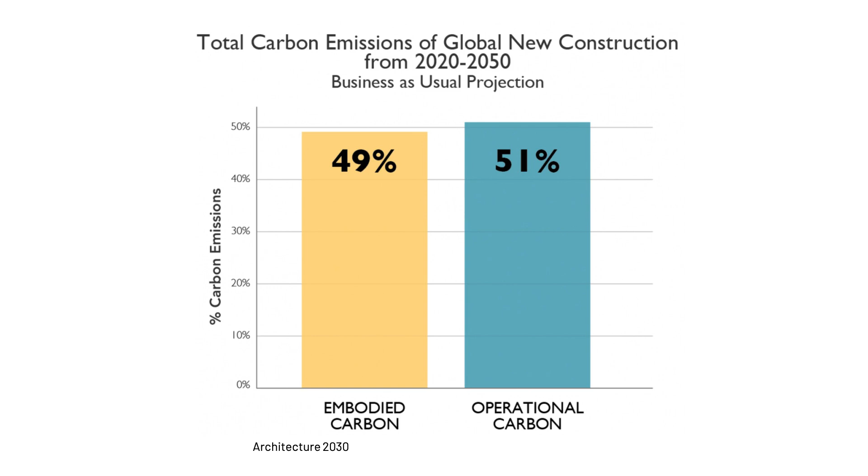About 3 or 4, maybe 5 years ago, it started to become obvious through mathematical studies that embodied carbon is actually about as important as operational carbon. Embodied carbon is the energy that goes into building the building - that's the mining, the forestry, manufacturing, trucking, getting it to site, and the energy on site to put it all together.

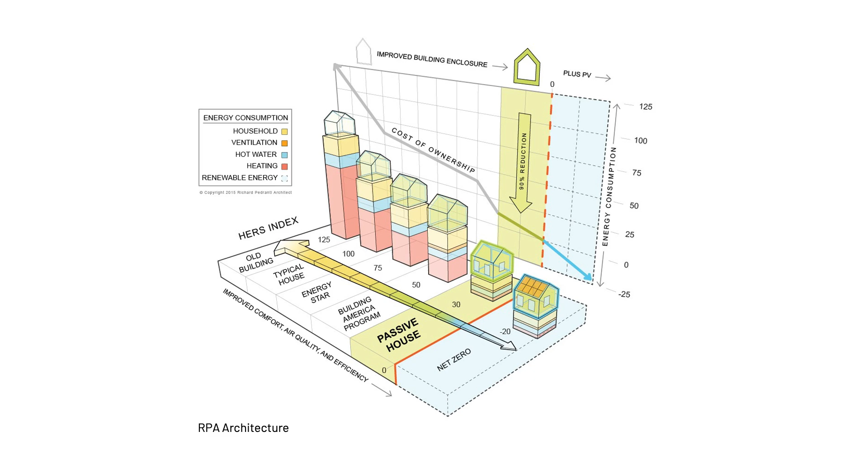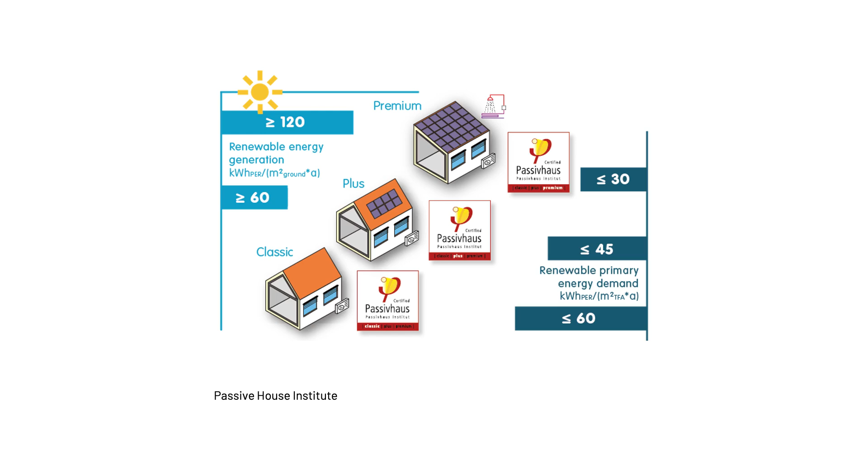Passive House itself also offers those classes - my house is a Passive House Classic. We have the ability, and it's designed to put solar panels on the roof, which is controversial because solar panels don't work maybe as well as we all wish they would around here. But nonetheless, through these different stages you can get to a 90 to 95% reduction in your energy use within the building itself, and then also start to produce energy on site and become energy positive.

So it's a great framework. One of the things about that is, if you're going to start producing energy on site, you really want to reduce your loads as much as possible before you start producing that energy, because energy is hard to produce. We use it quickly, the technology is changing all the time, so that technology becomes obsolete, and you're now swapping that technology out, and it's very impactful in its production, in making the technology.

So by creating a building that has as low demand as possible, now you're able to put in a very small energy production system and have a real impact on the needs of the building and hopefully its community. So how do you produce a passive house? It's not really that much different than the housing we're building today - it's just doing what we're doing, but a little more clever, and a little more of it.

My own house actually has 16-inch thick walls filled with cellulose. We got R60 walls, R100 ceiling, and the insulation wraps around the foundation. So that's the first step - really good insulation.

The second step is really good windows, and there's excellent windows being produced throughout Europe, and now they're starting to be produced within BC - that's helping to bring down costs.

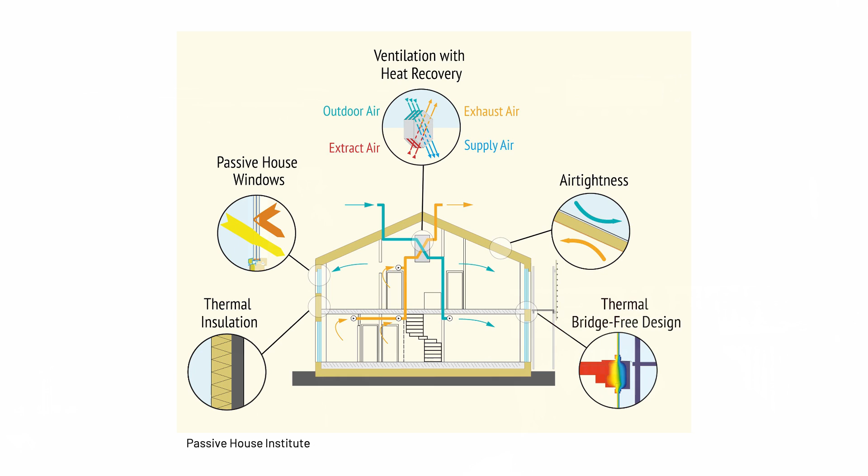And the last one is thermal bridge-free design. You don't want any large pieces of structure sticking through that thermal envelope, helping to conduct heat in and out of the building and causing condensation opportunities. And that's it, those 5 things.

We're already doing most of this. It's just that the software we're using to model it, HOT 2000, is an archaic piece of software and isn't as nuanced or effective as the Passive House software. We can get to that 90%, 80% efficiency through Passive House, where we struggle to get there with the software used under the STEP code.

And that really is the first job of Passive House. I'd say the most important job of architects and engineers today on the planet is to figure out how to get there as quickly as possible. So energy efficiency and low embodied carbon are of course first. But Passive House offers so many other reasons to consider building that way.

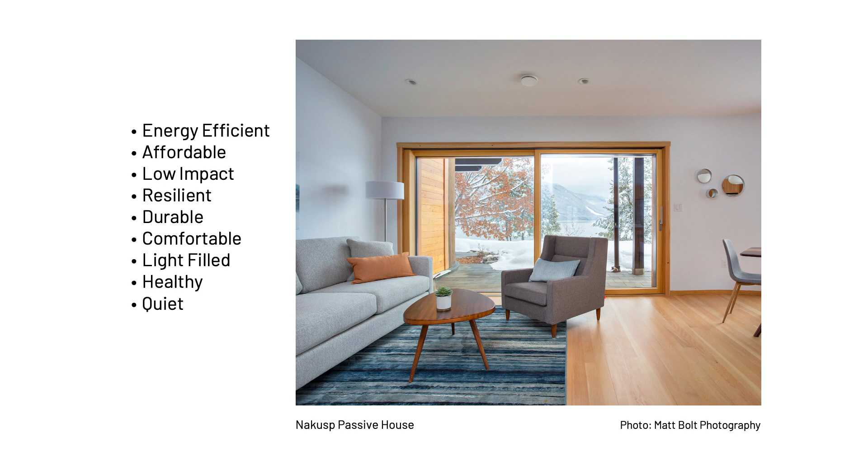Low impact we've talked about, and they're resilient. So we see climate change happening - this is the adaptation part. We now are having smoke-filled summers. The HRV has carbon filtration, 100% fresh air exchange, and because of the insulation, a very cool environment inside. Every single Passive House is a haven against the new smoke season, in addition to being warm all winter and cool the rest of the summer when the smoke isn't around. It offers that respite from smoke when it happens.

I've talked about how durable they are because we're not letting water into the envelope. If you make good choices in your cladding materials, you can have a building that'll last 100, 200 years, and with good maintenance, who knows. They're very comfortable because of the air exchange and filtration I've talked about. They're also incredibly quiet because of the thick envelope and excellent windows. I live next to a road that motorcyclists love, and Harleys can rip up and down it, and I don't even hear them. People come to visit me and I don't know they're there. So that can be a problem, but...

The living environment is incredibly comfortable, and they're light filled because you have to have sun coming in. It's part of the heating system, and there are human health aspects within the Passive House framework that demand you have light in all the important rooms where people are spending time.

This list doesn't do a Passive House justice. There are so many reasons beyond the low impact nature of the building to consider living in one. I've done a lot of work for BC Housing, probably 30 different projects of residential solutions for people, both on the Lower Mainland and regionally. They're a long-term owner, long-term operator, and in my opinion every single BC Housing project should be mandated to be Passive House, because they have to deal with that asset into the future indefinitely. So it makes a lot of sense.

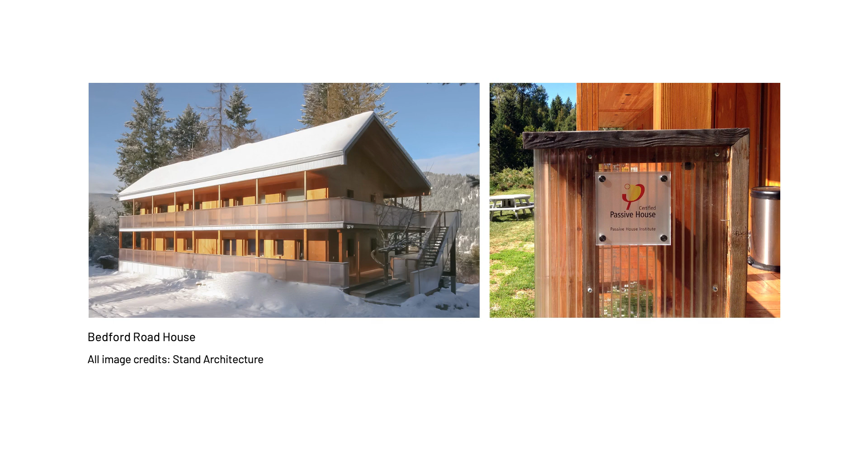So this is my house. It's a triplex - a 2-story building on the front side with a walkout basement. There's a bunch of technology about how we got there that I'm not going to touch on, but you can see the solar shading on the south side. This is approaching spring where we want the sun to start shading the windows, and because of the overhangs and the sun inclination, we're going to start to see those windows go into the shade so we don't overheat.

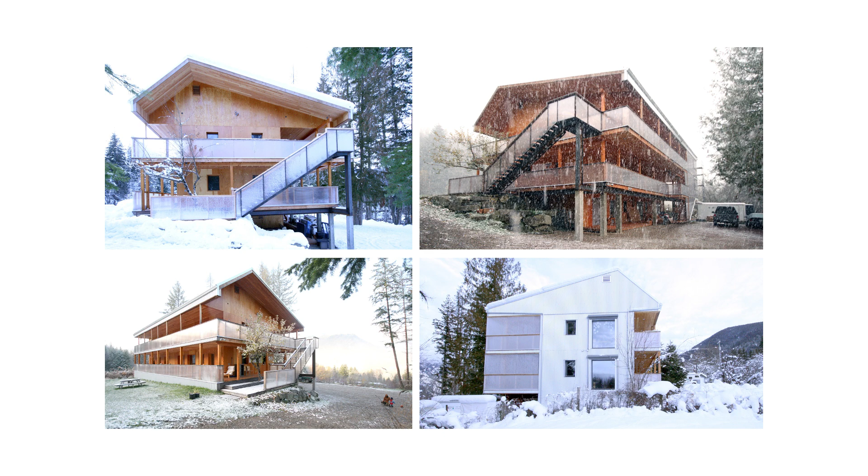Just one small thing you're able to see here - I need better pictures, these are all 10-year-old pictures - but the house was designed with a very small footprint, again trying to reduce overall cost of construction. My house was 600 square feet, my mom's is 600 square feet. My brother had a little more money at the time, and some metrics needed his unit to be larger, so he's got 1,200. But we have an equal amount of covered deck outside because we live out on the decks and in our garden. Why spend money on interior space? We put a lot of storage out on the decks, it's cheap to build, you don't have to maintain it, and it's not heated. Deck space is invaluable. So we built our tempered environment as small as we could get away with.

This is a house in Nakusp, again a triplex, for a woman who was so amazing and so supportive. She knew what she wanted to create, and she worked with us to create something incredibly beautiful.

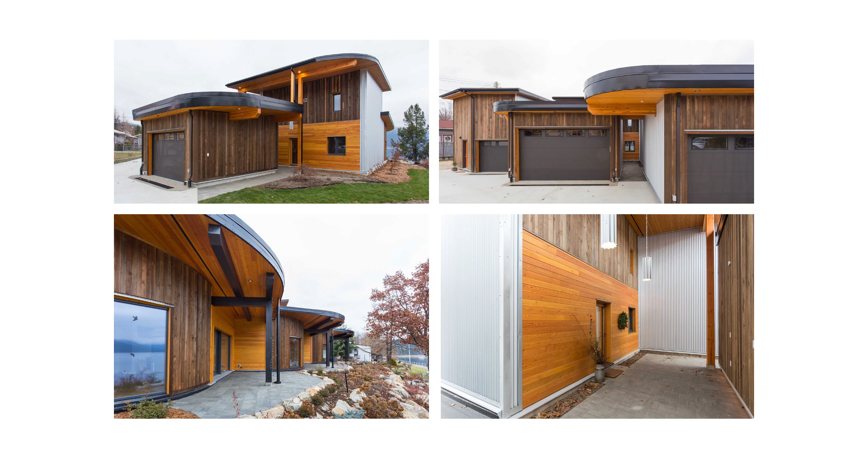They're all offset, so everybody gets a little private front deck facing right into their lakes. And it's a combination of some really nice, beautiful local wood, but also some fire smart steel.

They've got these separated garages that create an environmentally buffered space between the garage and the house, where the entrances are. The garages aren't heated, but the houses are. So why heat the garage? Again, just really beautiful light-filled spaces.

And she splurged on this giant 12-foot sliding door that went out onto the patio and faced the lake. Beautiful project. And then finally, the project that I've just completed earlier this summer.

This is the Castlegar Chamber of Commerce, one of the first projects in Canada, maybe a handful, to combine Passive House with mass timber.

Tammy Verrigan-Burke, a visionary CEO at the Chamber of Commerce, drove this project. We worked with her for close to 5 years to try to get to a solution. Finally, Clean BC came out with a grant, and we applied for the grant using Passive House as the grant vehicle, and we were successful.

The beautiful thing about that is when we came time to value engineer, which you always have to do, because it's certified passive house, you can't cut any of the very core aspects of the building. So we ended up losing some fancy acoustic treatment and some other bells and whistles, but we were able to keep the architecture, we were able to keep the systems.

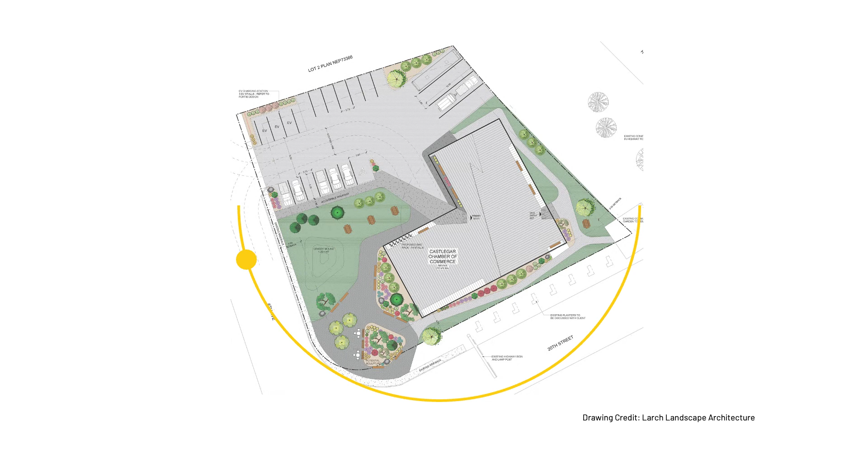It sits on the site in kind of an interesting way. This is the sun path, and because of that, we ended up with the pop-up windows, which are really part of the energy system.

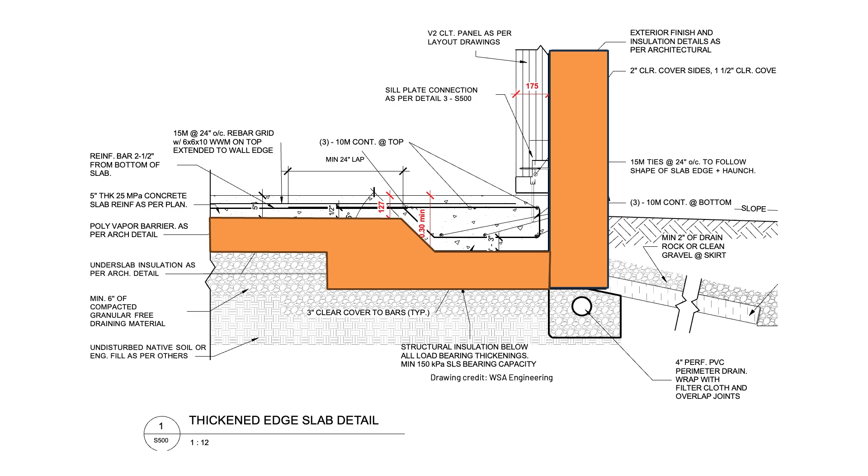This is just a quick shot of the foundation. It's got a slab-on-grade foundation to reduce embodied carbon, because normally we would do a 2 or 3 foot deep strip footing with a frost wall and then pour our slab on top of that. We were able to cut the amount of concrete used, I don't have it quantified yet, we're working on that, but it's probably about 35% less concrete used. And then that orange is the insulation wrapping all the way around it to fully separate it from the environment.

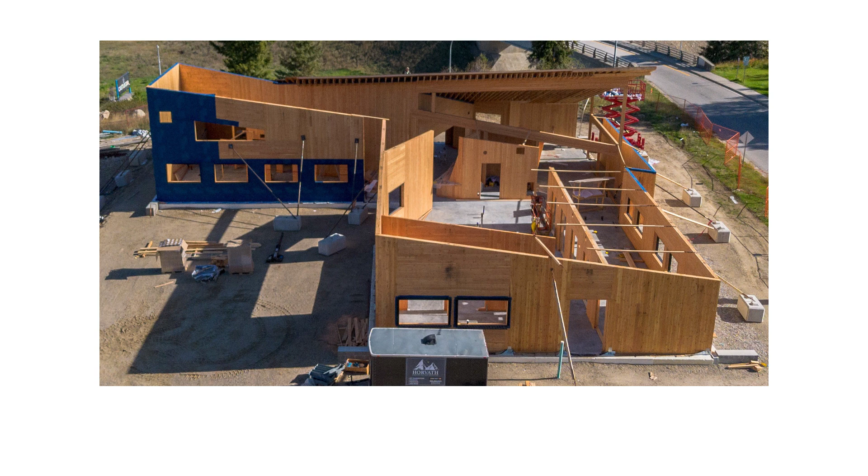This is the mass timber going up on site. Mass timber is a beautiful product. The whole structure with the roof went up in about a month, so we went from concrete to dry in a month. Typically with a hand-framed structure, that would have been potentially 6 months, which reduces labor costs.

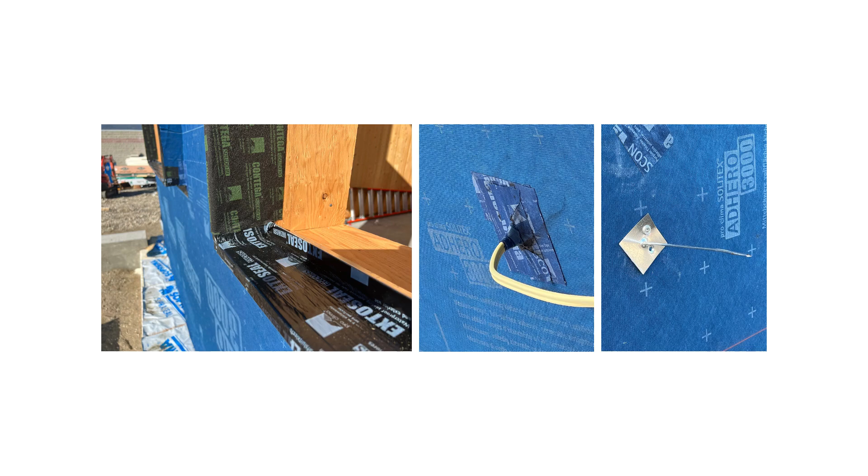Some shots of the interior as we're putting it together. This is the membrane on the outside, sort of like Gore-Tex, that creates the air barrier, and you can see how careful we need to be in sealing every single penetration so that we end up beating that air change threshold.

We got down to 0.45. The passive house threshold is 0.6. My own house actually hit 0.2. Step code mandates 1 at best, but we can hit 0.4 no problem. The tighter it is, the longer the building lasts, the less energy you burn. It's not really an issue.

This is foam insulation on the outside, which I'm not super proud of. I don't like foam, but it was a cost-cutting measure, and it did meet all of the other metrics, and it let the project go forward. So we ended up having to use it. I'm a big fan of cellulose, post-consumer recycled content, etc.

It's a beautiful building. I'm very proud of it, actually. And I think hopefully it sets a bit of an example for how we can approach the built environment regionally going forward into the future.